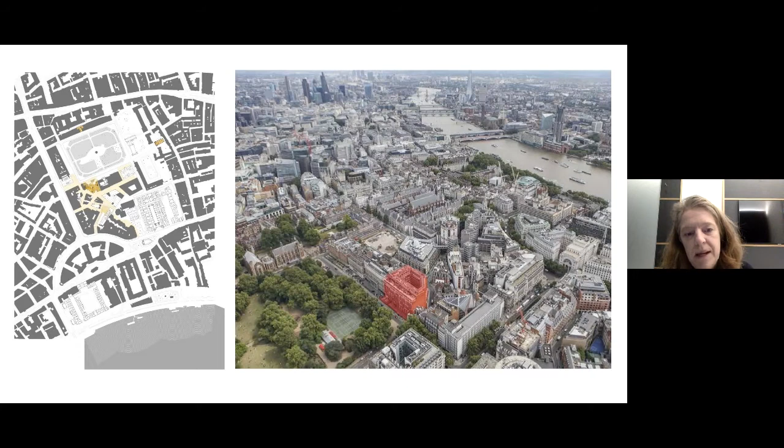At approximately 18,000 square meters, the building houses lecture theatres, teaching spaces, informal study spaces, offices for academics, PhD students, and for the Marshall Institute, and a large sports hall in the lower ground floor, squash courts and associated sports facilities, music rehearsal and arts facilities. Next slide.

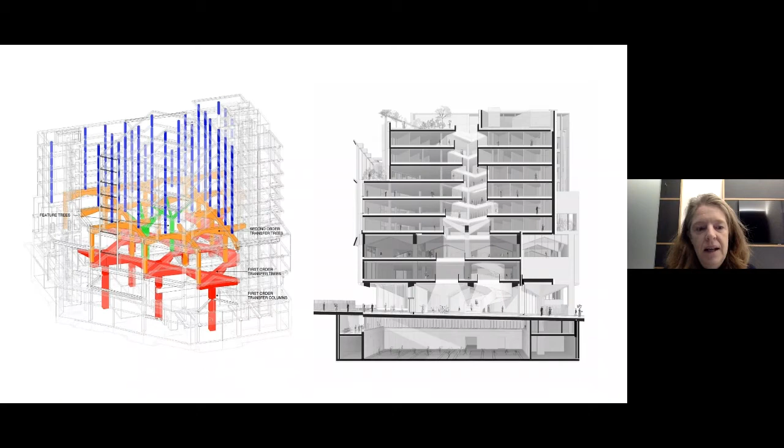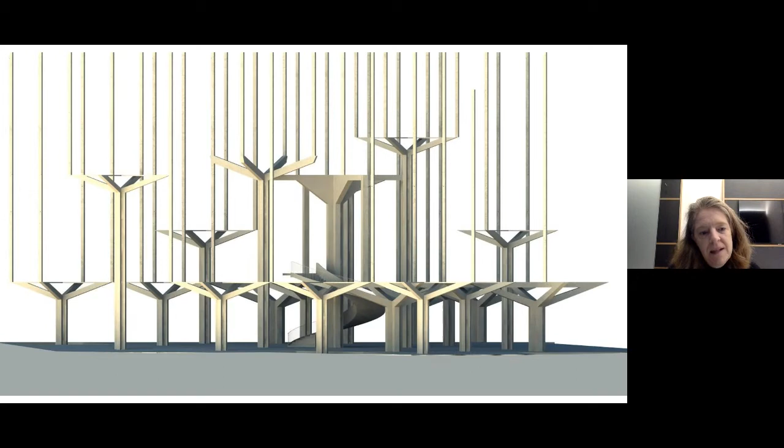And then given the variety of uses, the idea was to make a structure which would creatively deal with the need to transfer from smaller spans at the upper levels to the ever increasing spans at ground and lower ground levels. And this led to a weave of tree-like columns and beams, which direct the forces of gravity to the ground through an increasing outward spread of the diagonal branches. Under these tree branches, there's a large open space, a great hall at the ground floor, which provides new social space for the university. And this is one of the early design drawings that convey this tree-like structure.

So as you can imagine, it was a very, very busy time for the team, and the workload was very significant. This included drawing reviews, contractor meetings, production of set out information, etc. And our team were all based in Dublin, and we had been travelling frequently to the site. Can move to the next slide.

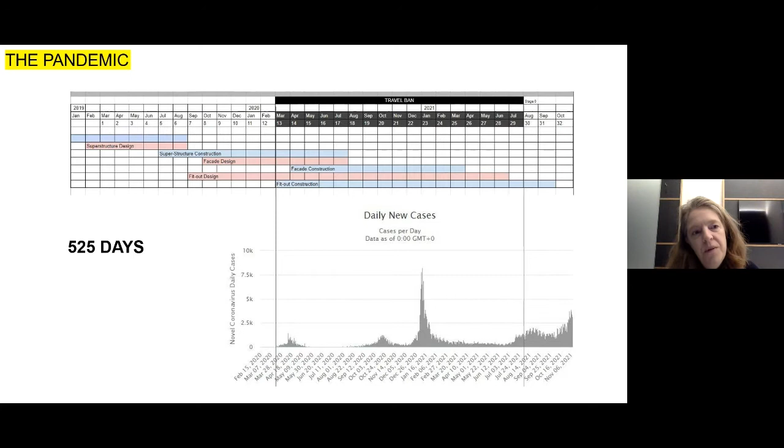So this is just a little diagram showing our workload and the pandemic in conjunction with one another. So when the lockdown came into force in Ireland, it coincided, as I said, with a very busy period, and the site really only shut for 2 weeks, and design work continued during that time. So we had to really seamlessly migrate to remote working. And there were no more visits to London, and in fact, in Ireland, we couldn't travel more than 2 kilometres from our desks. So it was quite a different scenario to what we'd been used to. So the question was, how would we maintain or even improve the quality of our service in this period?

For this period, when site visits were conducted in person by Anne and Adam, and then virtually by the team in Dublin, we had to trial different methods before we hit on the one that worked. And in the end, they consisted of about 3 parts. Firstly, the person on site was given time to just walk the site, to just take the building in as normal. After that, there followed a live video conference with the team in Dublin, the advantage of that being that they had all the drawings and specifications at their fingertips.

And then finally, as it would happen, there were areas where there was no Wi-Fi or mobile data. So for this, we would take videos to analyse them further back in Dublin. And what's interesting about this process is that this has informed some of our more recent site visits, so there was something to be learned from it.

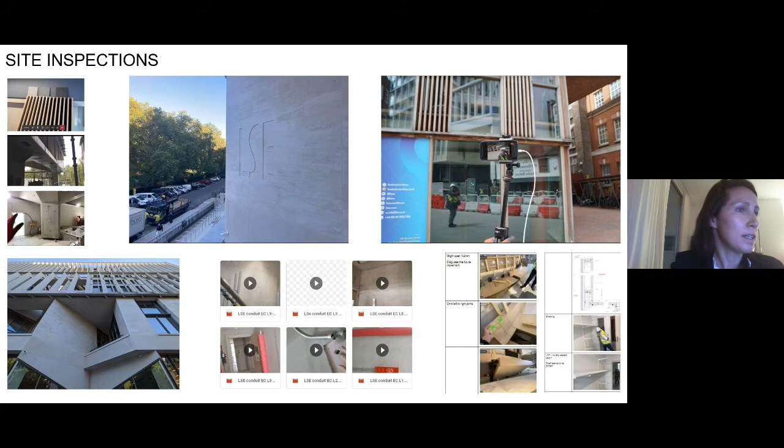These images are of the north elevation, which faces on to Lincoln's Inn Fields. And you'll see the large 3-storey panels being erected by Techrete on site. The panels made for this building were produced in Dublin by Techrete. So luckily enough, we were able to visit the factory floor before COVID hit to see these actual panels. And then it was a real joy when we were eventually able to return physically to site again to see them in their final destination, reflecting the midday and evening sun in London as they were intended.

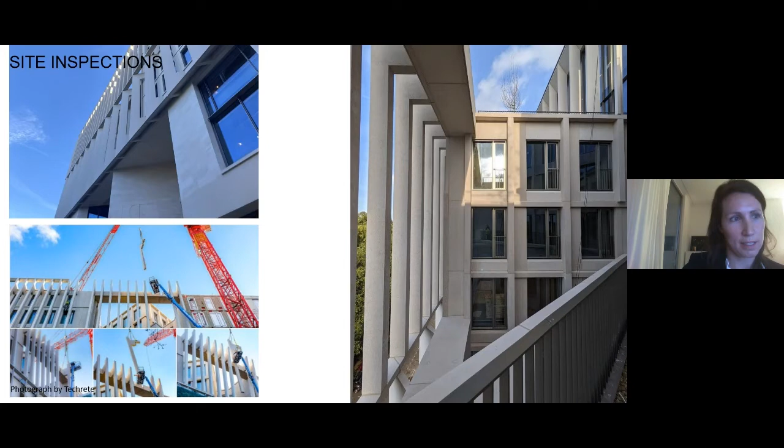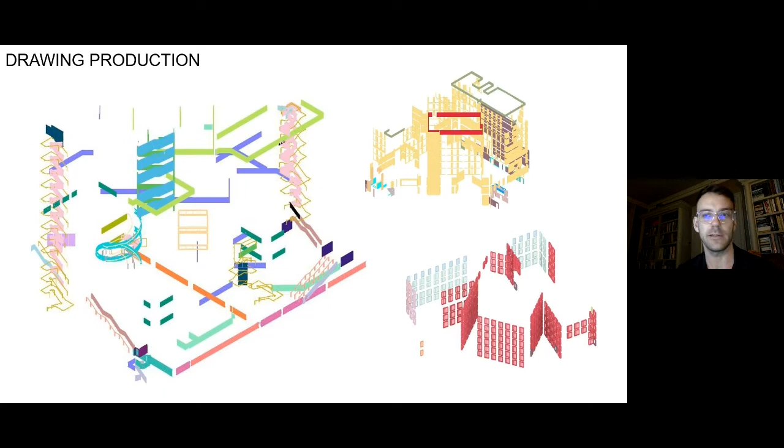Back in the office, we continued to produce information for site, as Anne talked about, set out drawings, details, sketches, and so on. We migrated our Revit models, which is how we worked, to a cloud platform to facilitate access from multiple locations around Ireland. But otherwise, our processes remained unchanged. Producing drawings from models continued to maintain coordination across our team, including our engineers and design and build contractors in the UK, and the only major change was that our rate of printing dropped to 0.

As we went remote, our in-office communication was replaced by messaging platforms, temporarily WhatsApp, followed by a migration to the online platform Slack. To mimic the office environment, we ensured that all comms were held in open channels visible to the whole team, and this had the advantage that all members of our team became aware of topics that were ongoing, which supported learning and allowed awareness of interrelated issues across topics. This also fostered a sense of team endeavour when people were quite separated from each other.

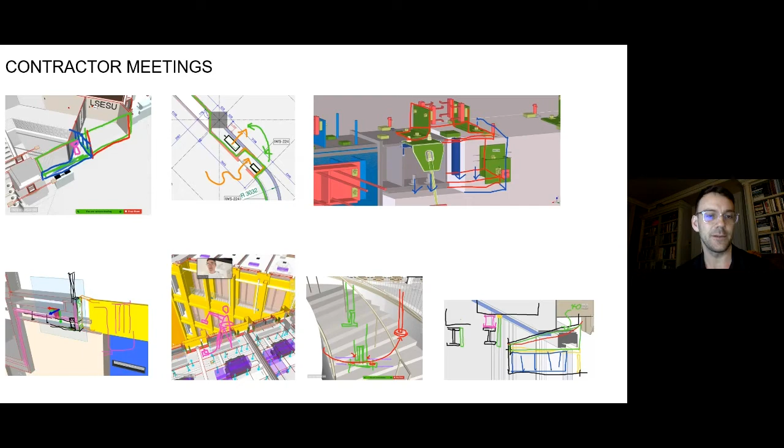So another challenge was how to monitor the quality of materials for the project without being able to visit yards, so stone yards, quarries, etc. But as Fiona had said there, we were fortunate in the timing in that we had already chosen mix designs for the concrete, and the stone had generally been agreed pre-pandemic. And what we had to do then was arrange for facade consultant representatives in the UK to carry out quarry visits and we'd attend by video link.

And I think physical on-site expertise for these visits cannot really be replaced by technology to judge what the tone or the consistency or the quality of the material is. So we were fortunate that we were able to have a representative in the UK to carry this out for us. Next slide.

And then similarly, the period during which no travel was permitted for us coincided with an intensive period of sample reviews and approvals and benchmarking. And again, we were very fortunate that we did have a representative who could carry out these reviews for us while the team in Dublin attended by video link. And where feasible, we tried to have duplicate samples sent to Dublin, which was very beneficial, but obviously that couldn't always happen because there wouldn't always have been time to have that arranged.

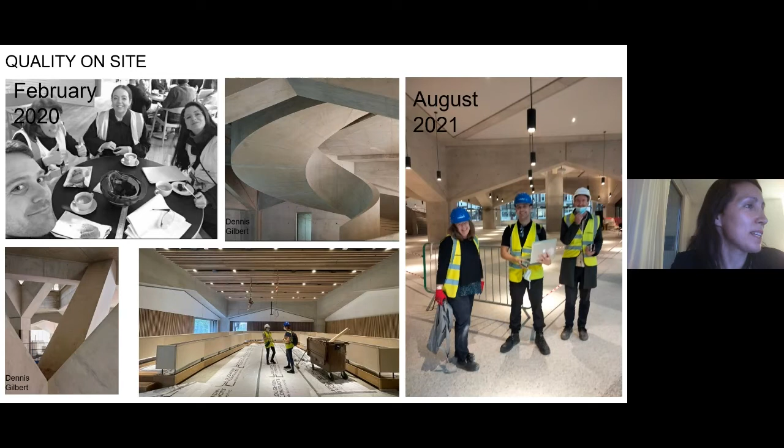What had been interesting about the site visits in recent months is that our experiences during 2020 have informed the process today. We could see the advantages of the dialogue between the site and the office setting. It means that the personnel most attuned to a certain part of the building or a certain detail on the project can join the site visit remotely, and they can jump in and out during the day of the site visit. So their knowledge and expertise can inform the inspection, resulting in a much more collaborative approach for the team.

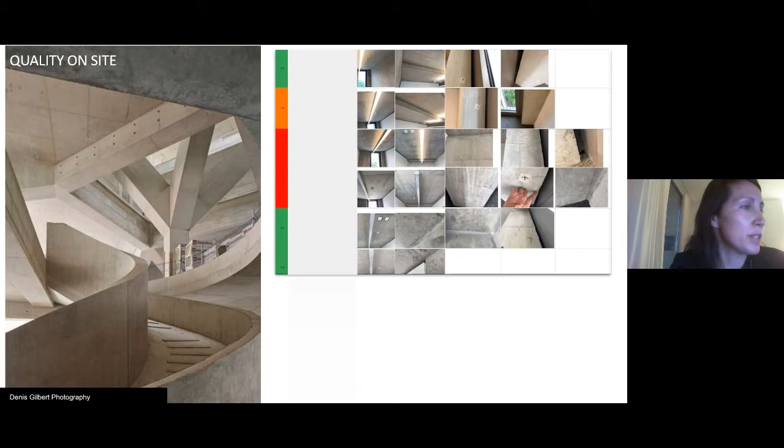We are now nearing the end of our inspections, and for these final inspections, we're using a new tool for us, BIM 360 Field, which is an online software that keeps all photos, descriptions, and location pins from the inspections in one virtual space. And we have to say it has been a joy to see the project unfold up close and personal on site, physically over the last number of months.

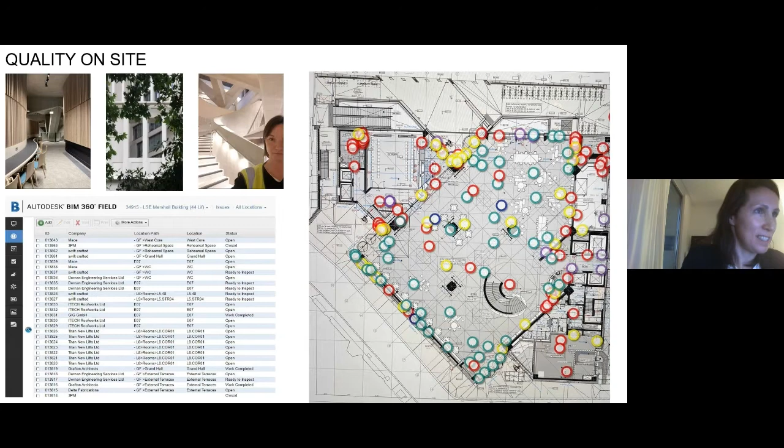This is a picture from one of the first times I returned to site physically in August of this year, once the European-wide travel ban was lifted. Ultimately, it was amazing to see it, and the building came together better than I think any of us could have imagined. A number of factors worked in our favour in this regard, but especially the exceptional team of contractors led by Mace and the visionary client team at LSE.

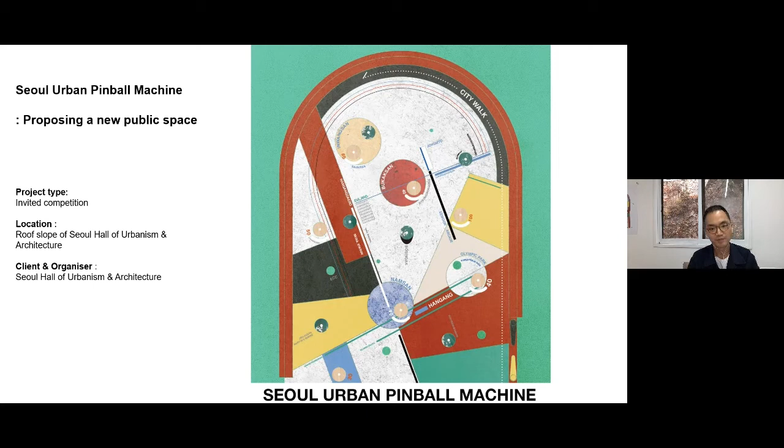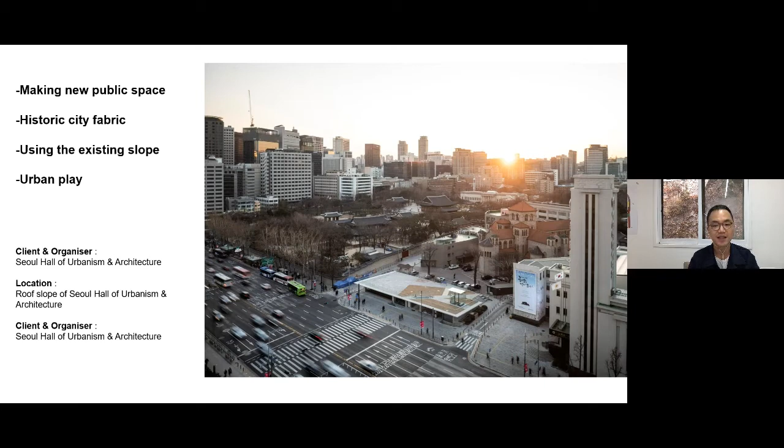The site is located in the historic city center of Seoul. As you can see here, the empty existing slope of Seoul Hall of Urbanism and Architecture. We would like to explore new types of public space as well as a landscape that can experience the existing physical slope. The physical model we produced during the competition stage.

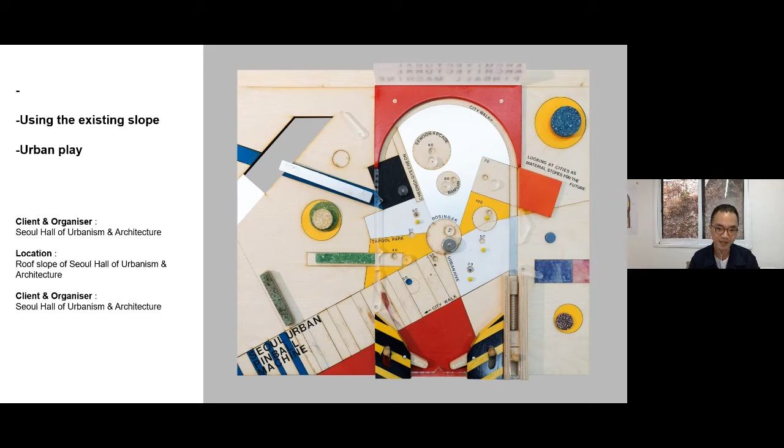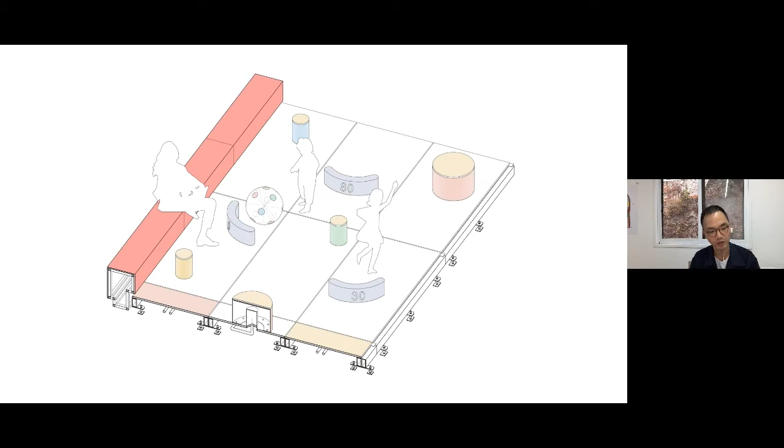This model is a means of experimentation for creating a new landscape as an urban playground, using the existing slope. On the existing slope, we proposed a 9-meter by 18-meter giant outdoor pinball machine, installed with objects and furniture made using eco-friendly materials. This system is a 1-meter by 2-meter, very light panel with interactive systems that trace and interact with people's behavior and the movement of the ball, and it becomes an urban playground, allowing visitors to play an outdoor game.

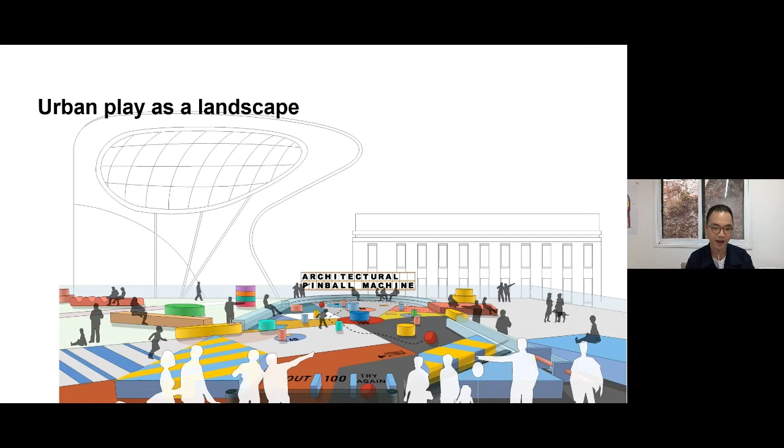The game field becomes a stage for play, and visitors become participants in urban play through the act of walking, running, dancing, sitting, and resting in their own way. The idea of the project was drawn from the initial question: what public space and public installation projects need to be like after the pandemic, which our city has never experienced. That's how it's installed now.

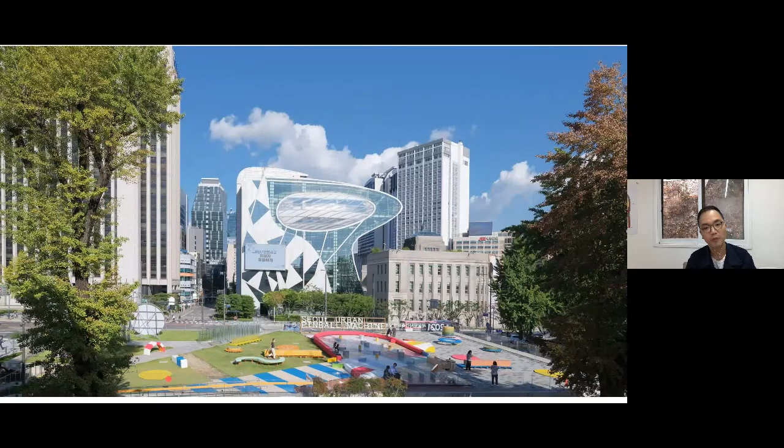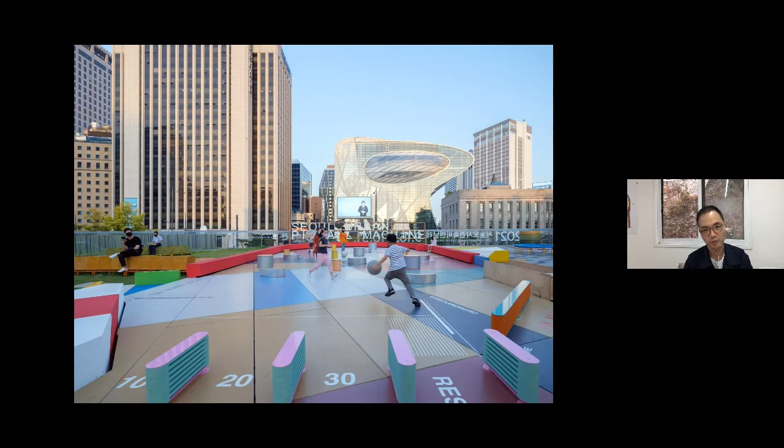The project is a landscape consisting of public furniture, objects and a playground, where the different materials and textures of the city can be experienced visually and physically. The visitors can launch a ball that travels up and down through the game field, which has printed graphics and objects expressing symbolic places and buildings of Seoul.

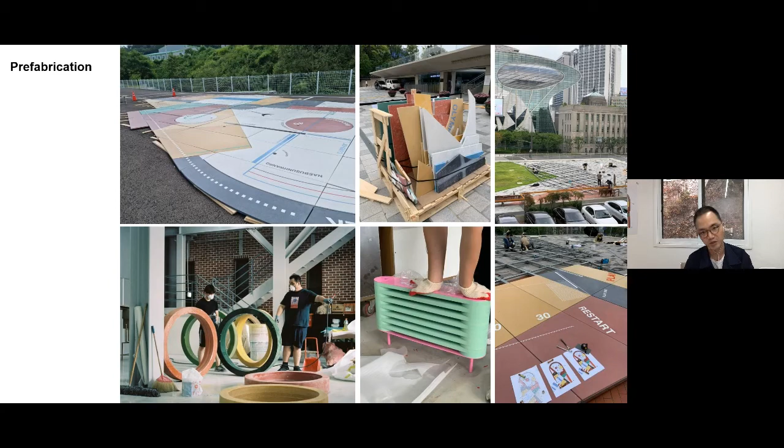This is an attempt to represent a new perspective of our city after the pandemic and create a new public place where the civic community shares its confidence in urban resilience. The project will be dismantled, moved and reinstalled to a landscape park just outside of Seoul a month later.

I think I sent the video clip showing how people play in that space. Last month a group of architecture students visited the site and they had the pinball game together.

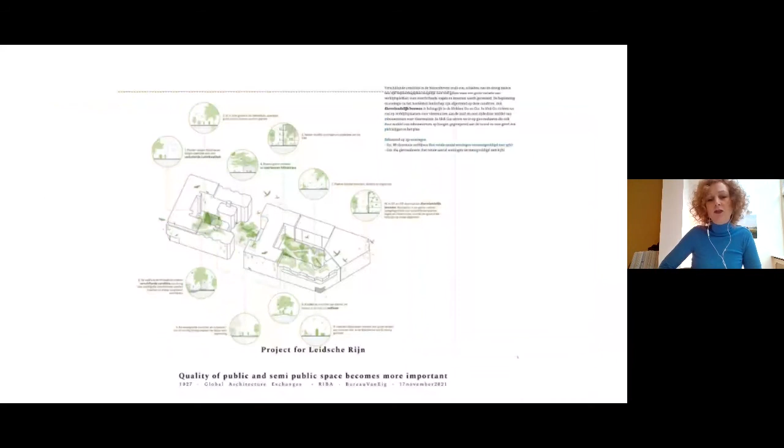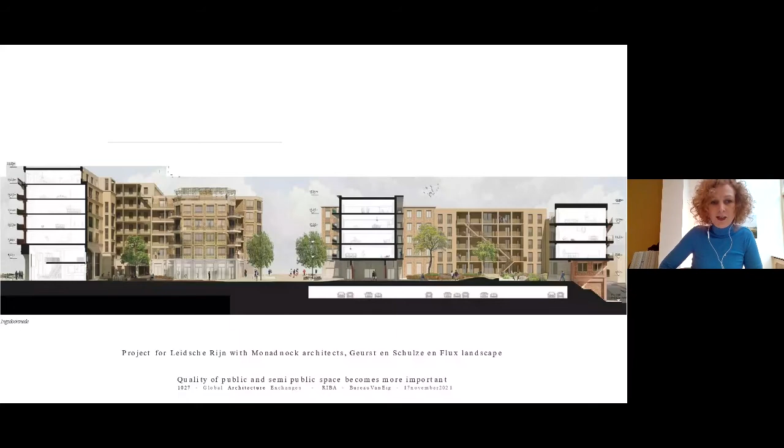We did this project with Monadnock and Geurst en Schulze in Utrecht, and it changed the way we looked at how we manage these public spaces around our buildings. It got a lot more quality, and I think COVID did change that, because now we looked very well at the staircases and the route we use to go home, to get into our home spaces, and what this routing is all about. And I think that's a quality that's stressed now.

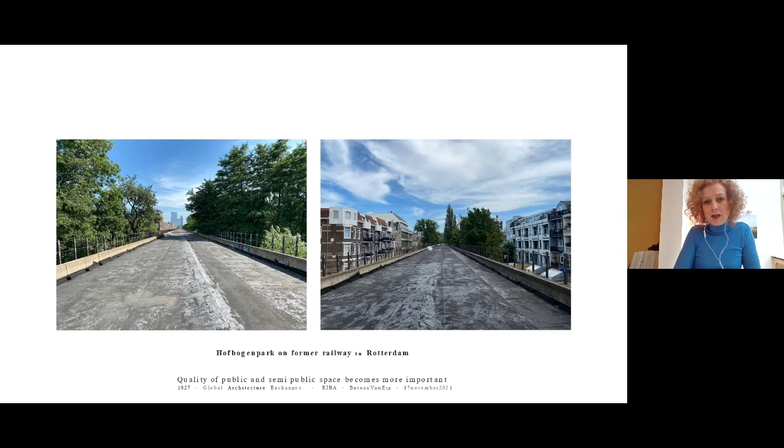It also made us look at the Hofbogenpark, which is a monumental space in Rotterdam. It's going to be like the High Line in New York, but much smaller, not in length, but in width. It's only 6 meters wide, and it's done by the Urbanista. It's going to be a park of about 2 kilometers all through Rotterdam, designed by the Urbanista.

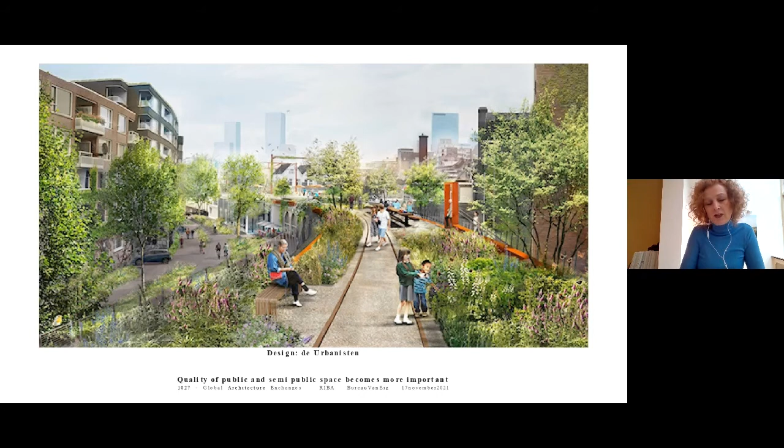Sorry about the pixelated image, but it shows how they want to make this park a High Line through Rotterdam, which is a green city, but it can be a lot greener now, and you see all these high rises. So we were asked to do the staircases up to the park.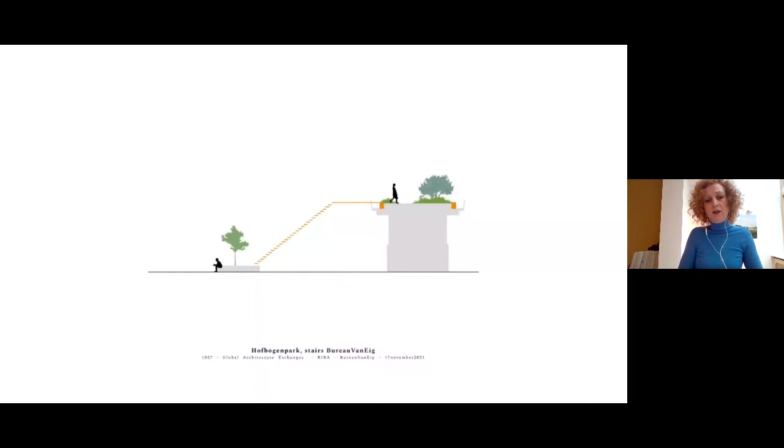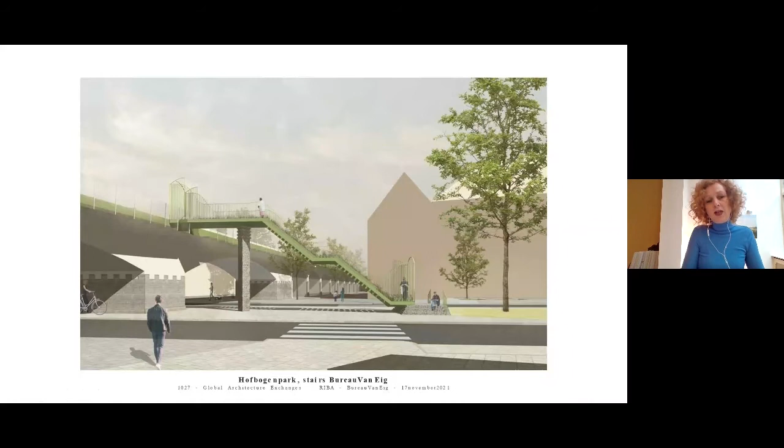It's called the Hofbogenpark. So it's these stairs that are landing on this sokkel, which has the same material as the landings of the Hofbogen itself. And because it's so heavy, the stairs itself are very light, and they do have this curved ending and beginning to get it closed in the evening.

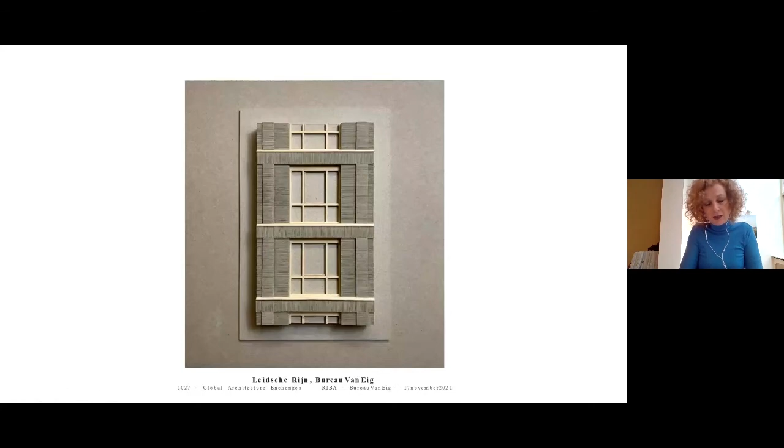And then the last one I think is coming is a project in Leidsche Rijn, which is based on the designs of Muzio in Milan. The photos I showed you earlier are from a trip I did to Milan, and these Muzio buildings are all about making these cassettes, facades, and this relief. So we did try to do that in Leidsche Rijn.

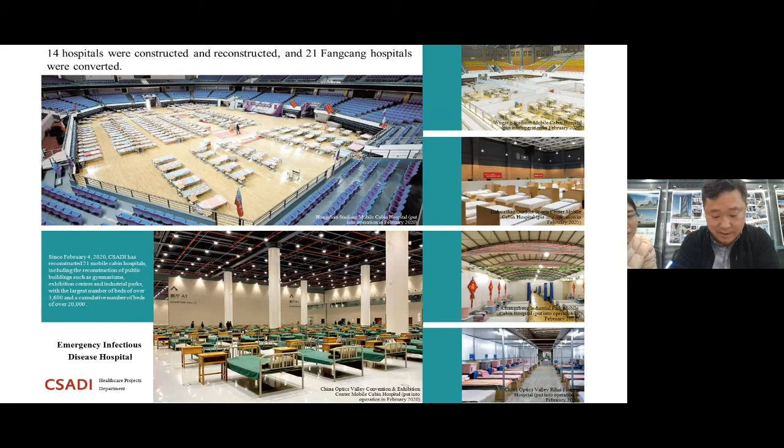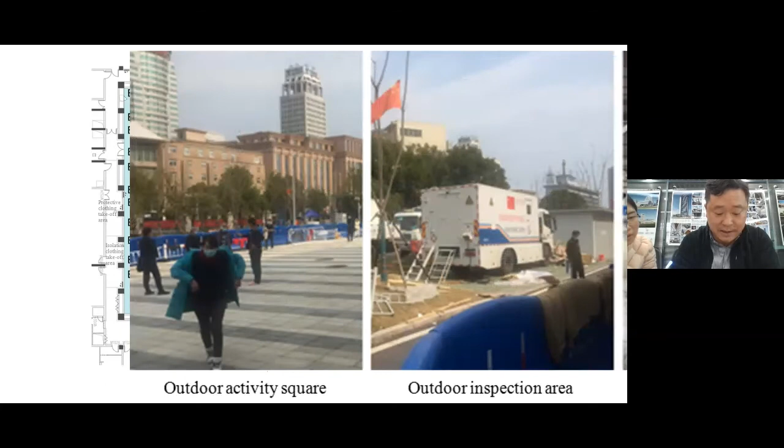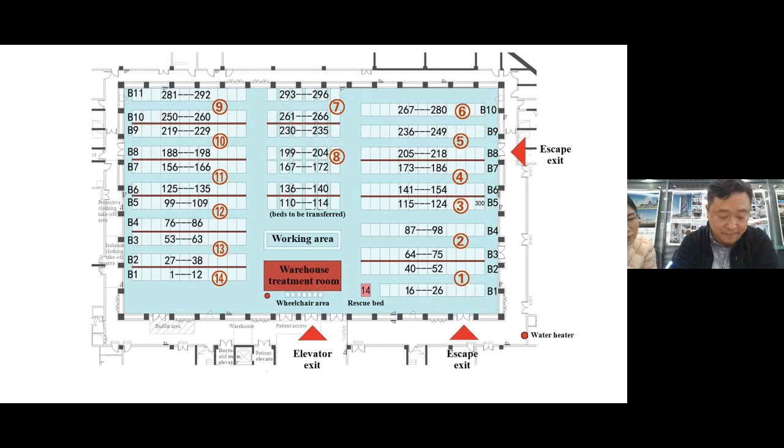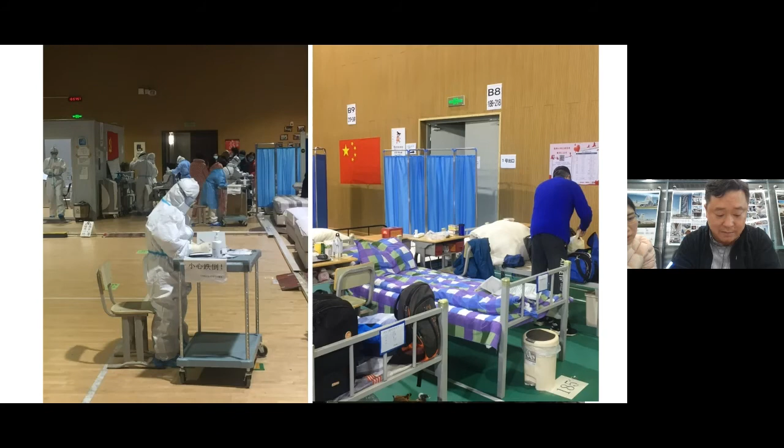Next, the makeshift hospital adopts enclosed management. However, compared with conventional infectious disease hospitals, it has the following characteristics. Next. First, a makeshift hospital is an infectious disease hospital where the contaminated and the clean are strictly separated. Second, in order to avoid the spread of infection, relatively high-risk places were temporarily constructed outside.

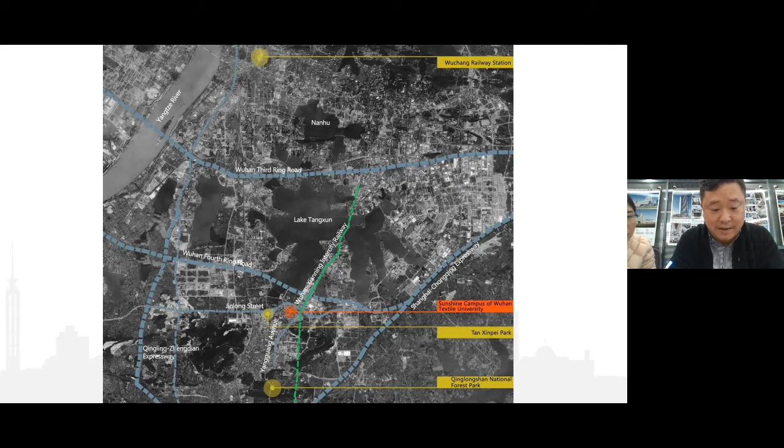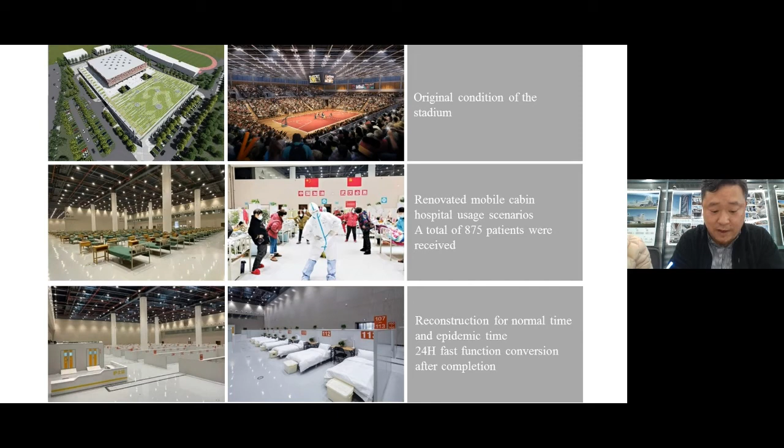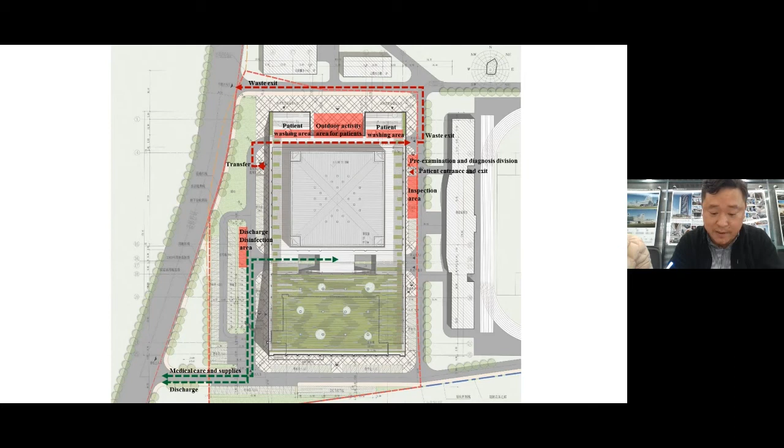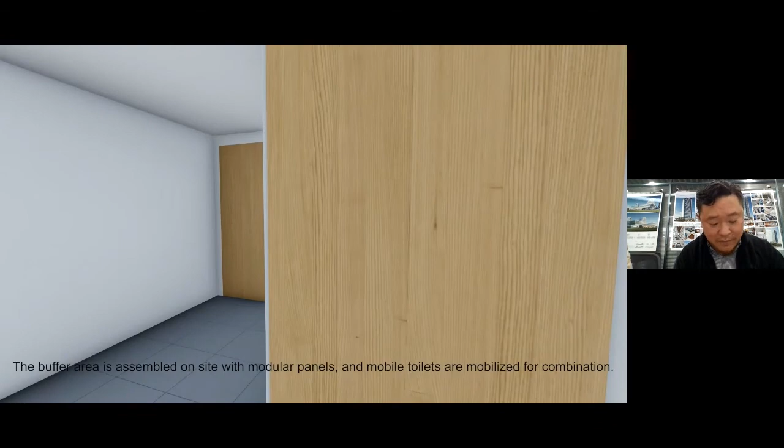Flow arrangement: ambulances, testing vehicles, logistic vehicles, and doctors enter through different routes to separate doctors and patients and clean and contaminated areas. The buffer area is assembled on site, with modular panels and mobile toilets for combination, safe and reliable, optimizing the passing process, with reserved mobile showers and toilets.

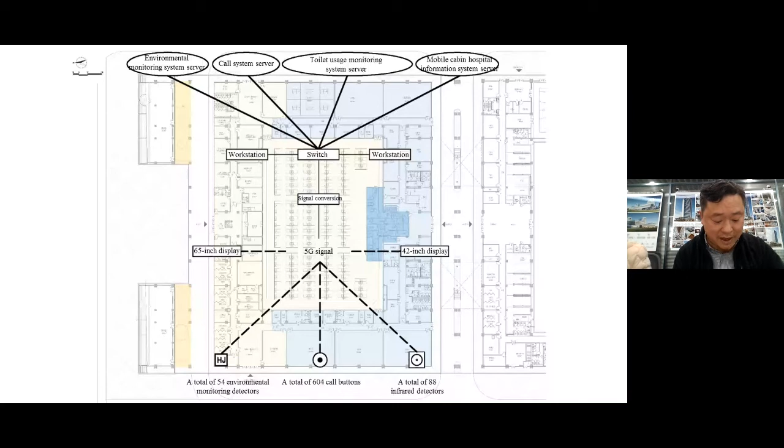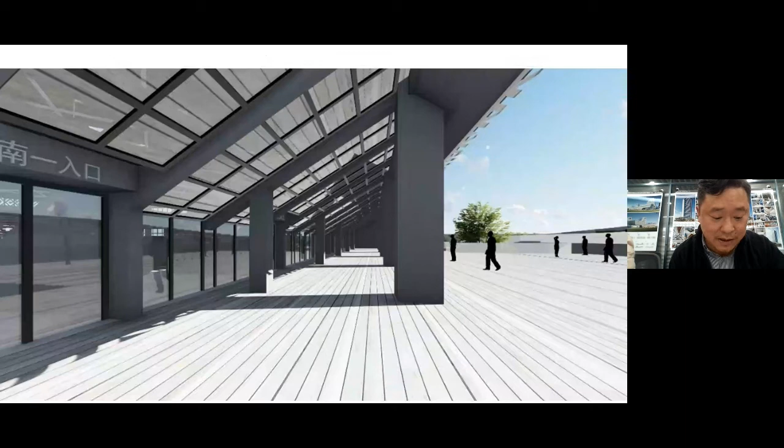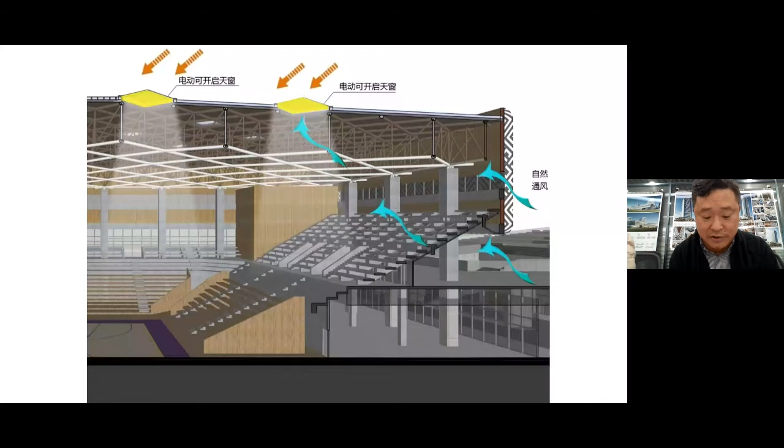The stadium is designed with natural ventilation and lighting in the hall. The underside of the seats is transparent, and the slanted glass curtain walls are equipped with electrically controlled openable windows. The wind effect produced by the gradual rising slope of the stands and the thermal pressure ventilation effect of the electric opening skylight.

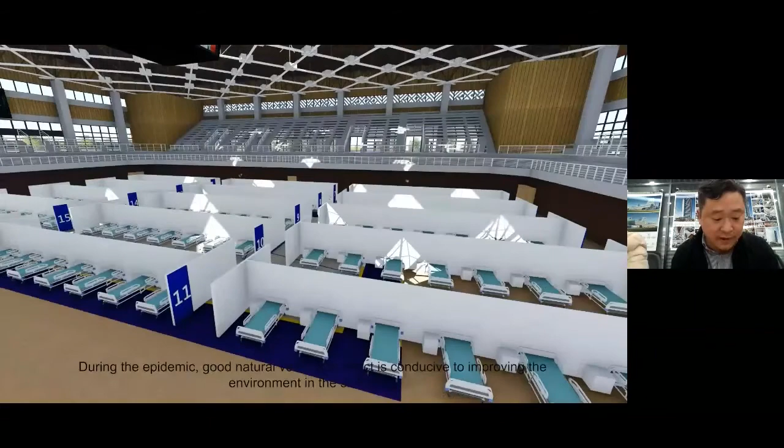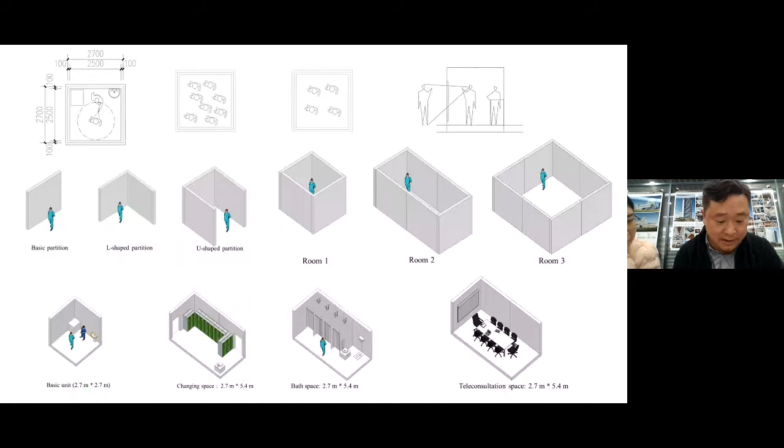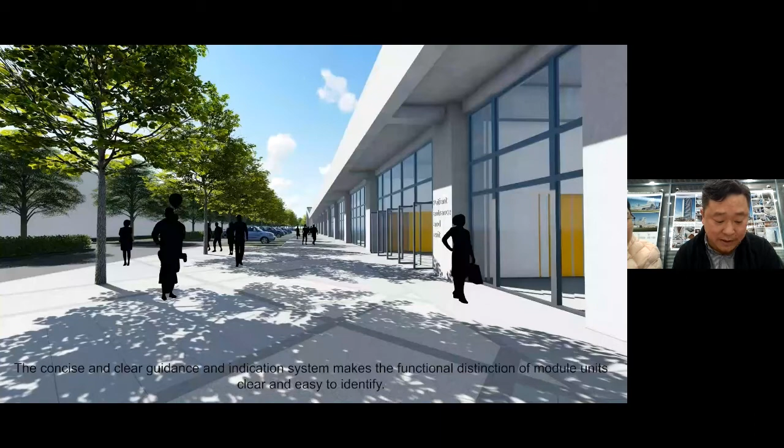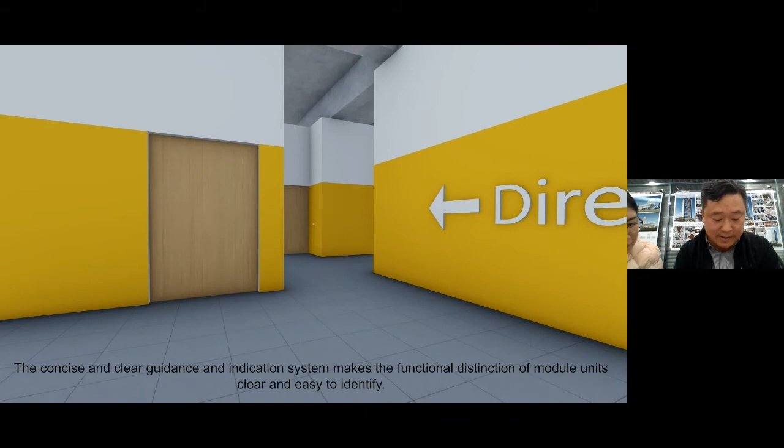During the epidemic, a good natural ventilation effect is conducive to improving the environment in the sick area. On the roof, it effectively ensures indoor natural ventilation and adjusts the indoor microclimate. We standardized design. The basic modular unit of the nursing area is 2.7 and 2.7. The concise and clear guidance and indication system makes the functions of modular units distinct and easy to identify.

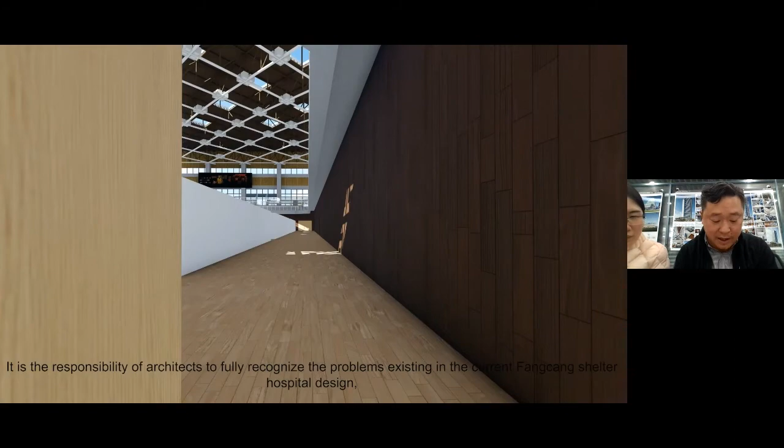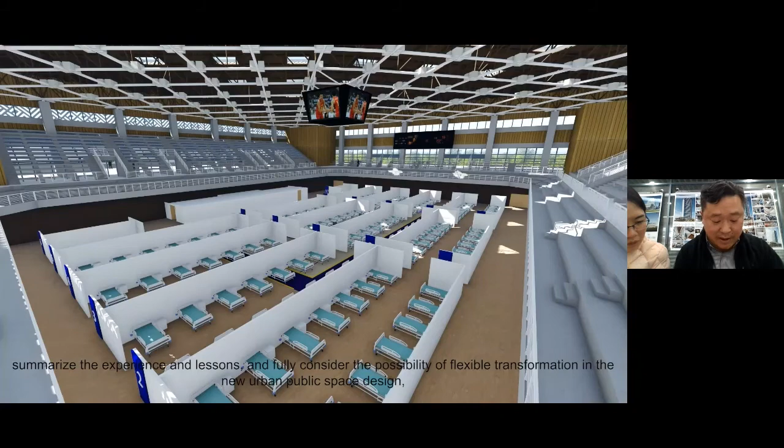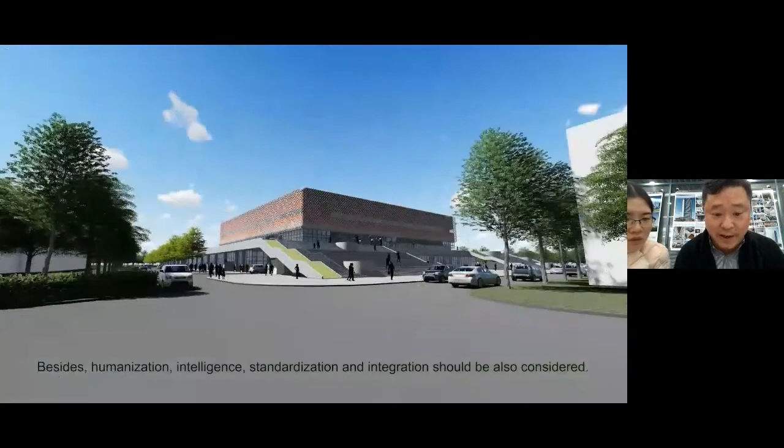It is the responsibility of architects to fully recognize the problems existing in current makeshift hospitals, summarize the experience and lessons, and fully consider the possibility of flexible transformation in new urban public space design, so that future urban public space can be easily and quickly converted into a makeshift hospital in case of an epidemic. Besides humanization, intelligence, standardization, and integration should also be considered. So when the next epidemic hits, we can be methodical and confident. Thank you very much.

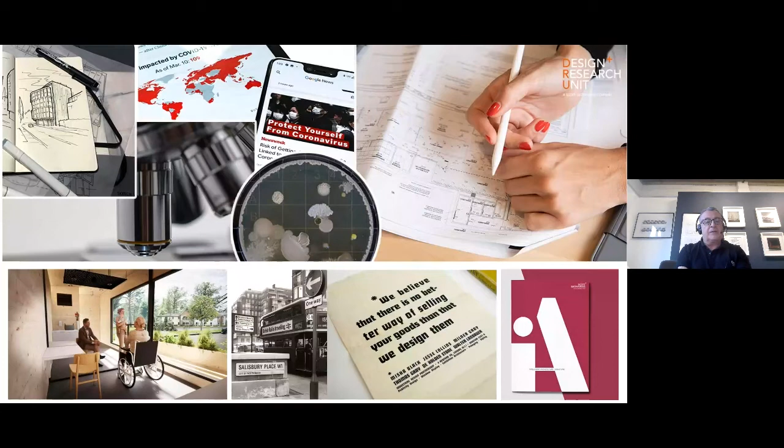models across the cloud. Our design research unit kicked into action at the start of COVID and started to look specifically at COVID-related solutions, not just material science, but space and place, materiality, air movement, and the social impact of COVID. And you can probably see our pod in the bottom left-hand corner. Design strategy unit was an app that we had developed about workplace environment, but we could actually roll this out and gather this as data as a web-based application to all of our clients to start that engagement process.

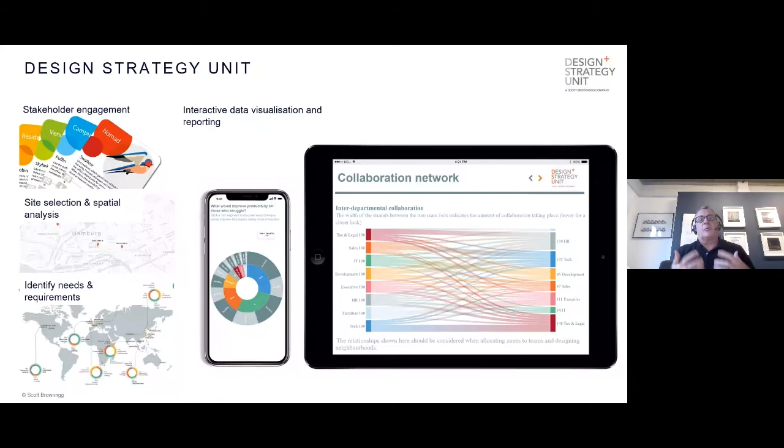And part of my presentation is very much about the front end and how did we manage to continue that as an architectural consideration.

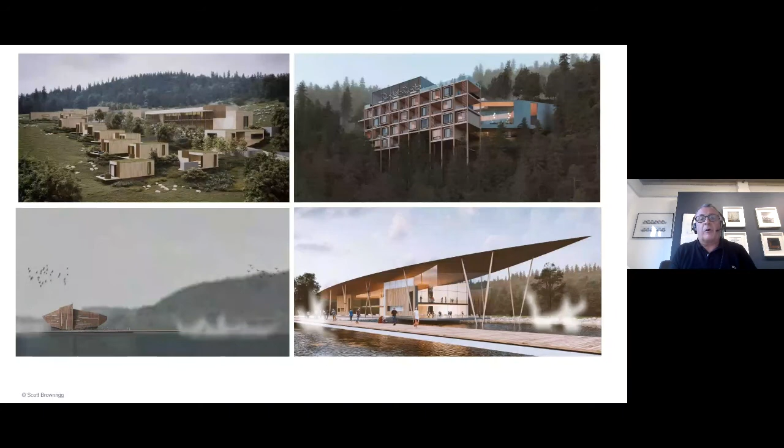And even in the bottom left-hand corner, you can see the idea of a floating theatre that we borrowed from Aldo Rossi. So we could actually take community theatre to people around the outside of the lake. And without a shadow of a doubt, understanding place, I had the opportunity to go to New Zealand 3 times and gather the information and data first. But the design response adapted over the last 2 years about how we might respond to that.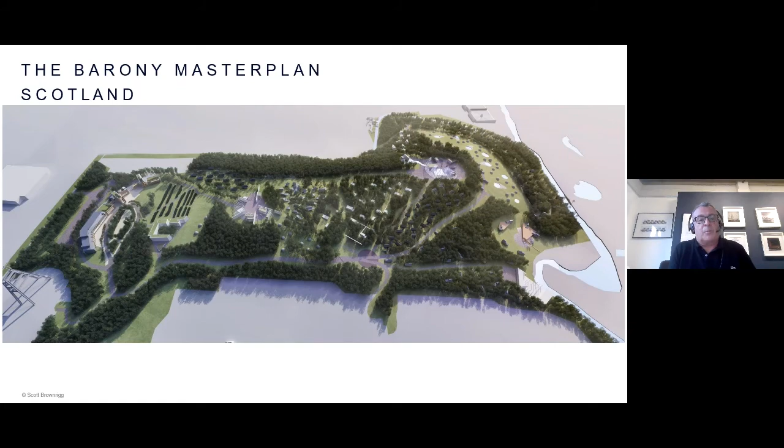That also informed a project called the Barony in Scotland, again, a substantial master plan, and there are lots of lessons that we learned from New Zealand, but here we couldn't go to sites. We had to gather as much significant data remotely as we possibly could with drone surveys, point cloud surveys, all kinds of additional material.

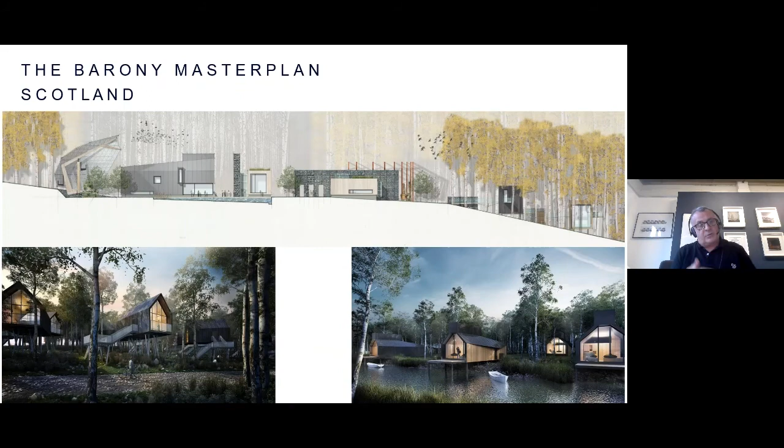And it actually taught me something about myself, and that is the way in which I draw, the way in which I construct drawings, and thought about how I could layer these to inform the students and my colleagues that were still working with me in terms of how they could turn that into three-dimensional models. And this facility is all about wellness. It's all about applying ecotherapies across the site.

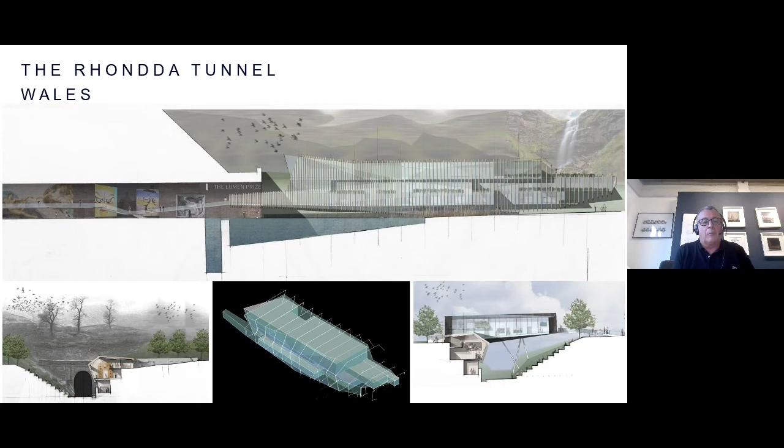The Rhondda Tunnel, even though this is only 30 miles away, was equally as difficult to get to in lockdown. In fact, a policeman told me that architecture wasn't necessary and that there was no need for me to go to site. But this is about a community art facility that occupies a 2-mile long tunnel that wraps itself right the way through a mountain in Rhondda, and digital communications, digital art, a perception of art that actually engages with

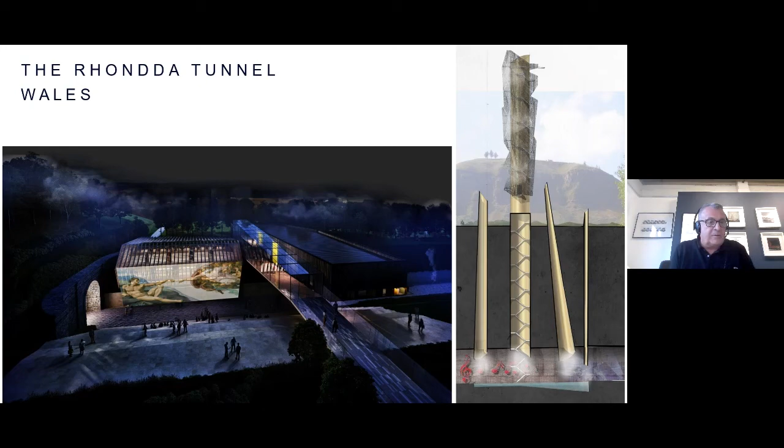the community and wellness, and even the ventilation shafts we turned into musical instruments and an observation tower to review that whole fantastic landscape that is only 30 miles away from the Cardiff studio, but it might as well have been Rotorua. And you can see here, this is the wellness and ecotherapy facility that plugs into the tunnel, and the tunnel becomes the world's longest digital art facility. So it's very responsive to landscape and place, and it was fortunate enough that we knew a lot about the site prior to that investigation.

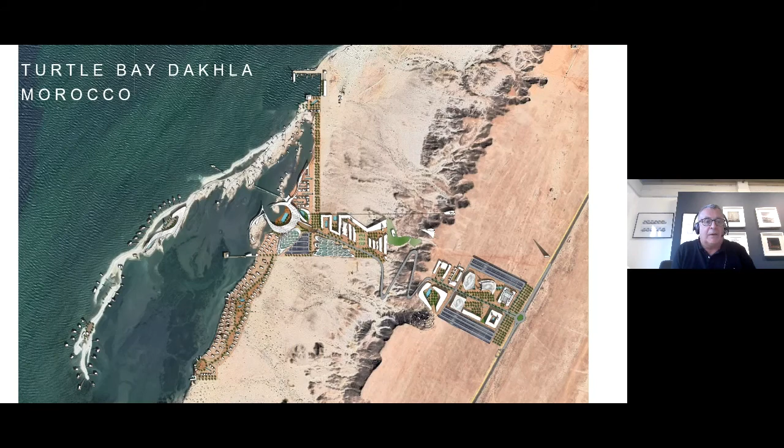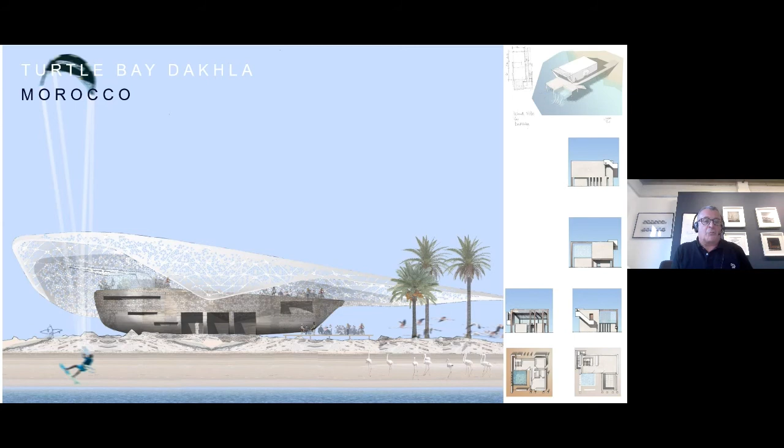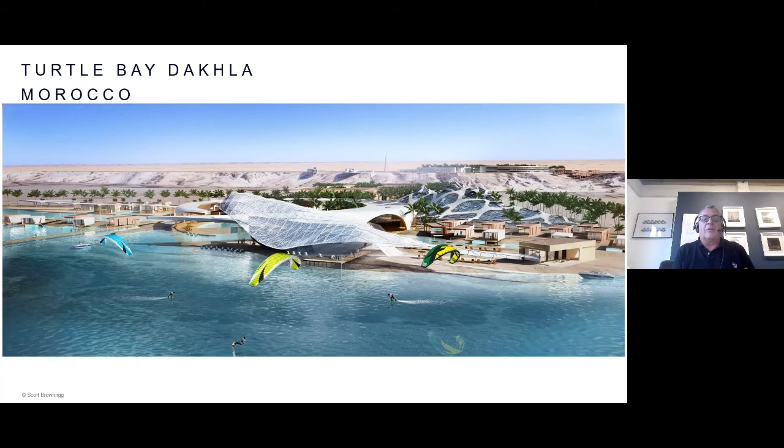So it's a kite surfing facility, and the kite surfing centre uses the Arabic mashrabiya as a motif that wraps over what is effectively reclaimed and sustainable timber that's put on the beach. This has interesting technology, cardboard moisture capture, sea house, greenhouses that enable us to have a circular economy and to feed the community on site, as well as hospital, local school.

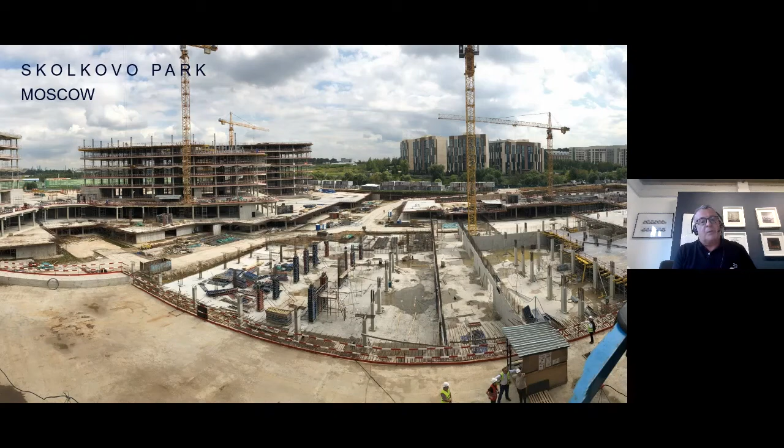And as my colleagues at Grafton explained, doing all of that in terms of the upfront design and how that manipulates itself onto site. This is a big scheme in Russia. It's very difficult to keep those processes going, but the uses of BIM, BIM Cloud, BIM 360 have informed us.